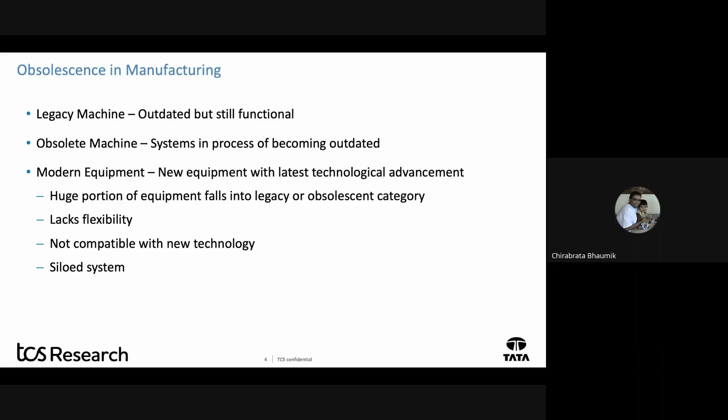So in computer terms we can say it's a problem of siloed systems. You will have various siloed systems at, let's say, your blast furnaces, your boilers. So everywhere you have data silos. Even if you have capability, no system is talking between them. So these are the real life challenges we have to solve.

So there will be data silos. Whatever old machines you have, if you feed them with sensors, then you have that data, but it is going to be in that silo. Maybe whatever you produce in factory number one goes to plant number one, goes to plant number two, but these two don't talk to each other because they have been built at defined times with defined vendors.

So you have a very efficient silo system at factory one, and another very efficient one at factory two, but they don't talk among themselves. So ultimately, your whole process is becoming very outdated. It's not 100% efficient. So somehow we have to take care of these things.

In theory, there is something called Conway's law. The bigger your company, the more you will see it. Conway's law says your software systems reflect the communication structure of the organization that designed them. So if you are a very hierarchical company, you will have many workflows by which the data will flow. If you are a linear company, it will flow in a different way. So it's a very practical problem.

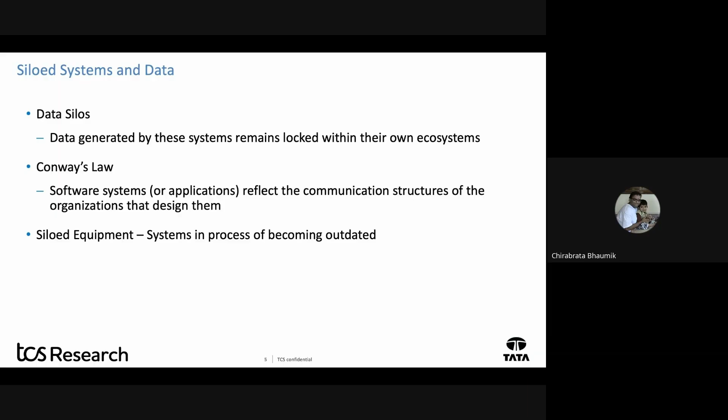All these silos don't talk to each other, and then you have siloed equipment. When you work in real factories, let's say there is a machine from Rockwell and another machine from Siemens. They are not going to talk to each other, though they say they follow all the protocols. Even in the header there will be something proprietary. So one system will work very efficiently in one plant, and another will not. These are real life issues we need to solve. How do we solve them?

Another problem is that in any manufacturing company there will be two systems. You will have your IT systems, which deal with your ERP data, your production output, your efficiency, and KPIs, key performance indicators. That is how IT systems work. But in your factory, the machines and supervisors work on what's called the OT system, the operational system.

The OT system just bothers about the plant's output, whatever processes, conveyor belts and other things are there. They will make patches and make things work according to their supervisor. So OT systems are generally totally siloed, and OT data in real life doesn't go to IT systems. IT and OT are totally different and they don't converge. People are trying, and even after IoT came people thought it would, but it is still not connected.

So this IT/OT divergence creates a lot of issues, and there are such challenges we need to solve there.

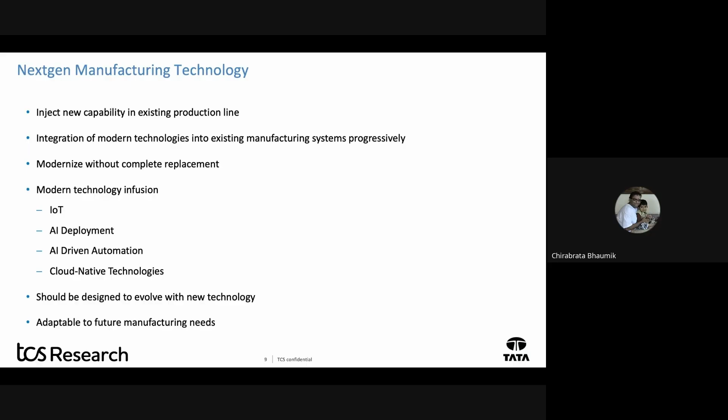So your AI system gradually should understand the whole system, and then you have many techniques by which you optimize the whole thing. And there will be newer algorithms, newer processes, and your system should be adaptable to your future manufacturing needs. So that is what the future holds. You have to be designed today to evolve with new technology. And obviously, it is not easy.

There are challenges. As soon as you start connecting your equipment into a network, and for making them work fully, you interconnect them with various plants and factories, the very next day the problems of cybersecurity will start coming. Like our PCs and mobiles, they will also be another equipment exposed to cyber attacks.

So there will be challenges in cybersecurity which need to be solved here, because generally these IoT systems or OT systems, the sensor systems today which are interconnected with these big machines, are not that great in security aspects. When they were designed, they were not designed that way. So they are generally very easy to attack, which needs to change.

There are challenges which need to be solved at every layer when you are introducing sensors for these equipments to supervise. You have to take care of the cybersecurity aspects of it. Since your data is now going to your cloud for more munching and for AI to take decisions, you have to take care, because this is the factory's internal data. It should not get exposed to the outside world for other bad things.

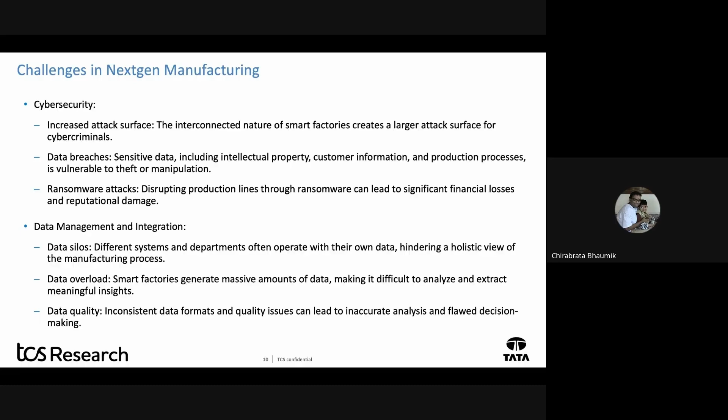There should not be many mistakes in the data. There should not be incoherence in the data. So data quality should be solved. So one of the problems is data quality, for which we have to find the challenges and solve them.

And next gen manufacturing, since gradually it will become more sensor oriented, your computer programs are going to take decisions. So basically your definition of skilled worker is going to change. So the future workers need to be more IT savvy. Which is today's day, there is a lack of skilled workers.

The OT, mainly the factory shop floor. The factory shop floor, the guys who work there, they know very much about the systems, how it behaves, but they are very challenged when they have to look at the data, time series data, and take some decisions. They are not that great. So that skill gap needs to be filled in.

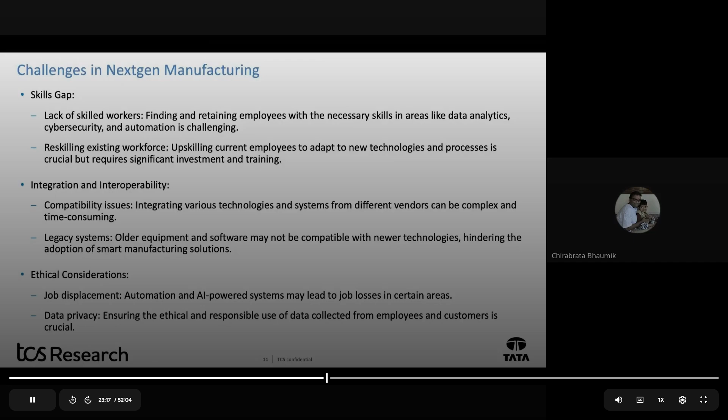And integration, whenever in IoT language or in cyber physical language, we call it system of systems. So when you have various plants and they are going to share data of their equipment and sensors, it will be a system of systems, which is very complex. And obviously the ethical consideration, that is out of scope for us.

And the tech stack, if you see, this will be more like the future smart manufacturing. At the lowest layer, like we are talking manufacturing, so there will be various domains. There will be automotive domains, pharma chemical domains, oil and gas. So there will be these domains.

And in the shop floor, in the OT systems, the machines there are going to be controlled by PLC. Today also robotics come. The robotics and motion controls, motor control sensors will be there. There will be various kinds of sensors, and all this data, like if you have legacy systems, they were going to your SCADA and HMI, so you cannot throw them out.

But whenever robotics is coming, like old days robots were controlled by PLC, but new age robots are coming with ROS and all. So how those will behave, this has to get integrated. And from an IT point of view, from a research point of view, in an OT and IT system there will be a plethora of protocols. There will be HTTP, Modbus, OPC-UA, your Siemens Profinet, MQTT.

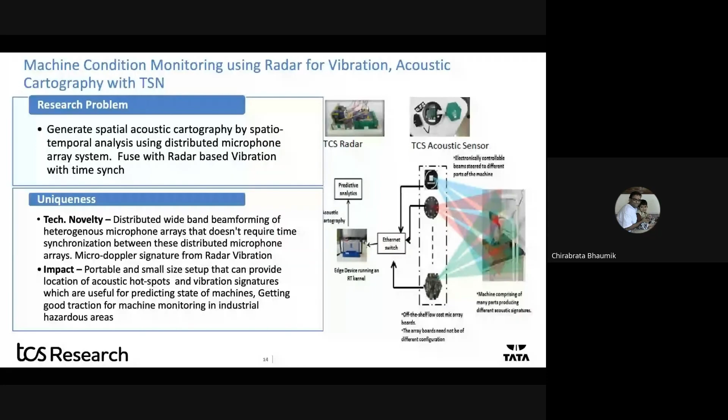So in the US and Europe, these companies themselves have labs in various cities, and they allow small companies to use their facilities, and they charge them on a usage basis, by the type of machine and the time they have used it. Currently the way is very rudimentary. It's like what we used to do in our labs in college. Whenever they enter, they sign, then they use it, and then they say I have used it for 2 hours. They write it, and according to that they are charged.

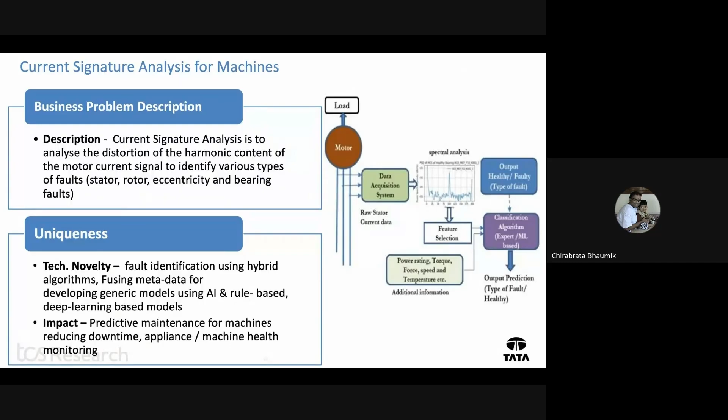So this is also a kind of non-intrusive sensing. You can use a smart meter, or there are low cost sensors, Hall effect sensors, which you can put on your live wire, by which you will understand how the machine is drawing current, and from there you will be able to tell about your machine load and machine health. So this is one of the ways you can use AI sensing.

And in future smart manufacturing, today's most commoditized sensor is your camera. So you will see in today's smart manufacturing everywhere, your material quality decisions and your machine health decisions are getting taken care of by using AI on your camera data. Camera is a very commodity item, its data is very well researched, and there are already a lot of AI algorithms available to crunch on that data and take decisions.

But what we will be able to see in future is what is happening inside. Let's say in a cement factory or a mineral processing factory, there are these big crushers. These big crushers have no transparent window. It's a huge thing which revolves, like the mixers in our home. In a cement factory, they mix the cement,

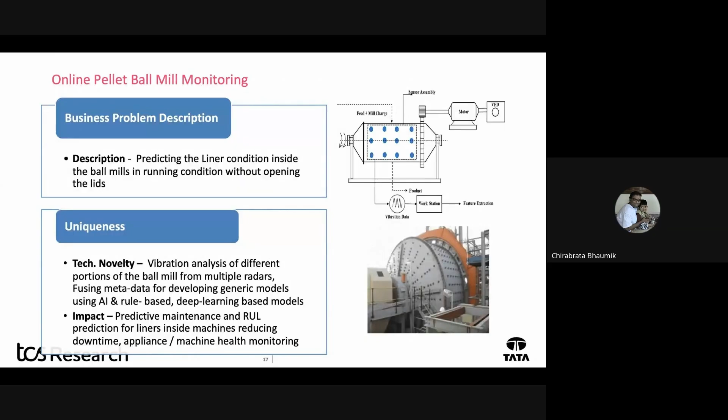And they have very expert workers who, from the sound of the machine, understand when they have to charge the machine with new balls, which is very heuristic. So instead of that, in future, using vibration and acoustics, you will be able to tell what is happening inside. So that is what AI-based sensing is about, going beyond the camera. This is one of the things we are trying to develop with a partner company.

And this is another use case we are trying to do, for steel plants. In steel plants, the coke is sent to the blast furnace for melting the iron. But the way we transport the coal, many times, mainly in monsoon times, it gets mixed with rocks, boulders, or something. Coal is very soft, but these boulders which get mixed are sometimes very hard.

And if it goes into the blast furnace, the blade before the furnace can break. If the blade goes bad, that is 6 to 8 hours downtime, which means crores of rupees loss. So what we are trying to do is fusing an RGB camera with a polarized camera. A polarized camera sends polarized light, and from the reflection it can distinguish between various materials. So whichever is not coal and is big, we can detect and take decisions on the conveyor belt itself while it is moving.

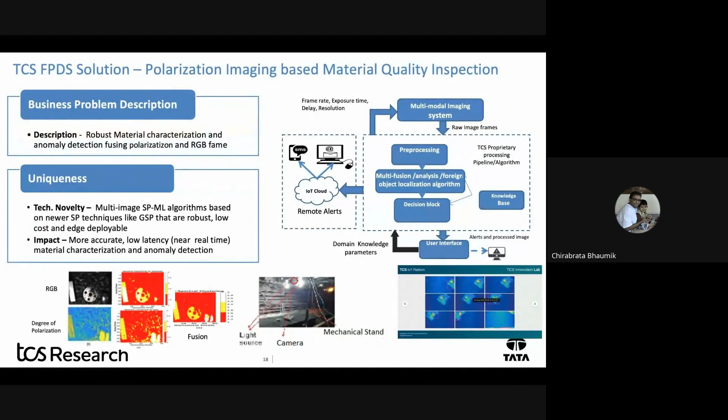So this is one of the ways AI-based sensing research is going on. Then, as I have told you, today it is all vision-based processing of the quality of the materials which are coming out of your various machines. But gradually, what we are trying to see is that only an RGB camera will not do, because whenever it gets mixed with other materials, a polarized camera will do.

And sometimes what we are seeing is that whenever you want to see inside whatever is coming out of your machine, whether something is happening, or what is the formation inside, you have to have more AI-based sensing. You have to do imaging which is beyond RGB. So you have to fuse RGB with ultrasound, with acoustics; various use cases will depend on various kinds of sensors.

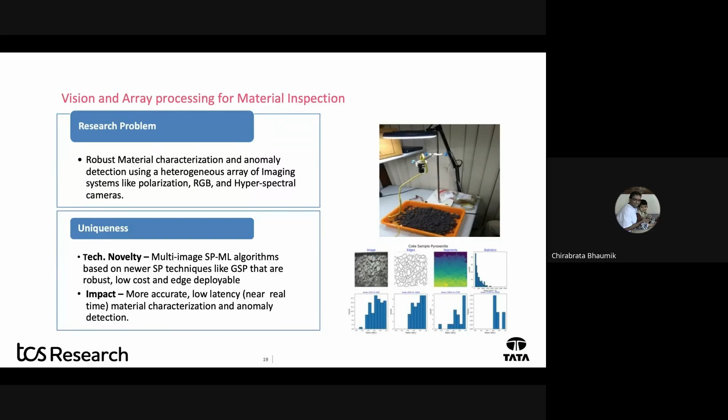And so that is one of our research areas, by which we are trying to say whether your material quality is good, by fusing your RGB with the other sensors. Sometimes it may be thermal, sometimes polarized light, sometimes acoustics, ultrasound. So that is one of our research areas: real-time quality monitoring using AI-based fusion and sensing.

Similarly, weld quality assessment. Today's weld quality assessments are mostly RGB-based or human, but sometimes it is not good, because in an automobile shop floor there will be hundreds of sheets going to be welded in one batch. So by the time your quality monitoring system, your RGB cameras, tell that it is bad, your 100 batch will go. So you lose a lot of raw material and a lot of effort.

So we will need systems which tell us when it is going bad. In automobile manufacturing, what is very popular nowadays is called friction stir welding. So we are doing research on the friction stir welding machine, like the way the spindle moves, and these machines are giving me the output, the power taken and the torque of that spindle.

So basically, by understanding that, we have taken a property, I forgot the name, some tensile strength of the material which is coming out. So whenever welding goes bad, this tensile strength will actually go bad. So using AI-based sensing, we have been able to predict the tensile strength of the material coming out.

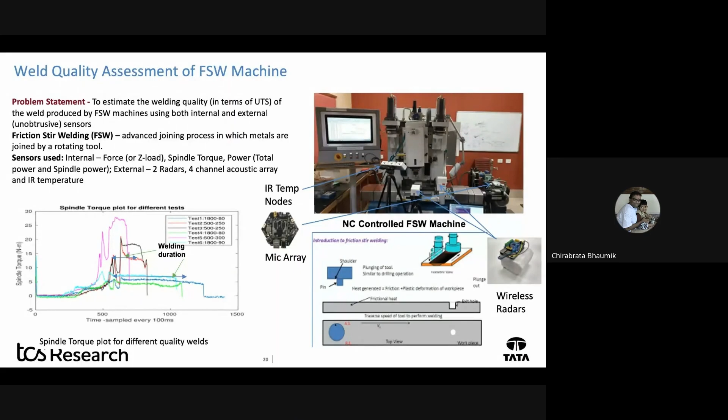Then there are many systems nowadays for quality monitoring of liquids, for paints, and sometimes for transformer oil. Nowadays you have to take it from the line to your lab, then test it with a huge machine or small machine, but it is not online. So you have to take it to the lab. Sometimes it is destructive testing for some of the cases.

If it is a coating on an automobile sheet, or let's say on your roof sheet, you have to measure your coating layer thickness and your primer thickness. So these are all destructive testing today. And for glossiness or color, you have to take it off the line. So if you take it from an automation point of view, these are bottlenecks which are not solved.

So when your AI system needs to solve that, you have to carry some kind of sensing by which you have to tell online that my coating thickness is not 2 micron, what it used to be. It is either more or less. And you have to take corrective decisions accordingly.

So one of the kinds of sensing, AI-based sensing, we use is called photoacoustic sensing. What it does is, if you heat it with a laser, the laser's heat will actually cause ripples in the liquid, and you can catch that waveform from an ultrasound from the other side, and using AI-based sensing, these are all time series data.

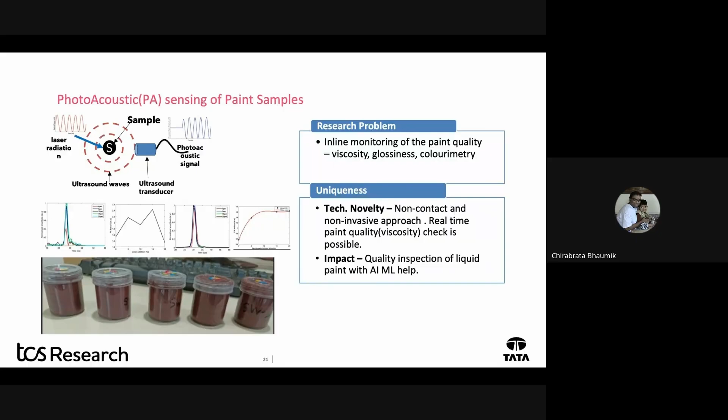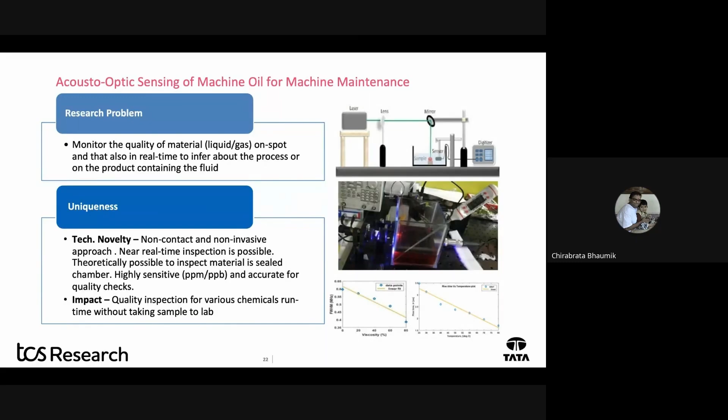So similarly for transformer oil, we are able to tell. Like those who run bikes, from the oil quality you will be able to tell when you need to change it. So similarly, using this kind of thing, we will be able to tell how much residue is there, and whether your transformer oil needs to be changed.

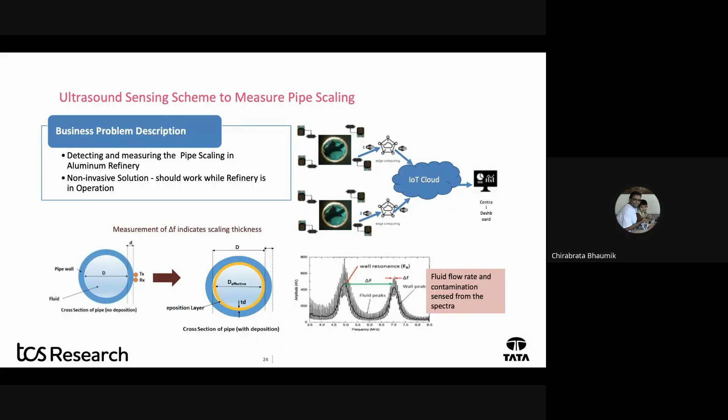So similarly to that, like I've told you, what is inside. In some cases like refineries, say aluminum refineries, when liquid aluminum flows via these pipes, it deposits on the inner layers, and these pipes get choked. So using some technology from outside, how will we be able to tell whether scaling is happening, what kind of scaling is happening, what is the inside condition of these pipes. So these are some of the problems we are working on.